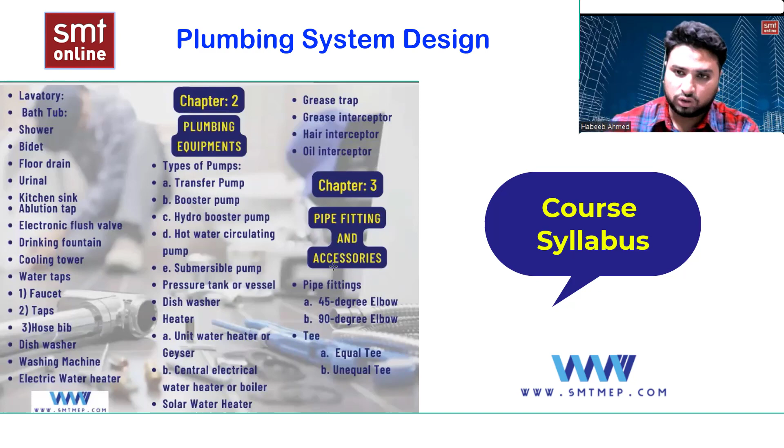We'll see why they are used, what the materials are, the purpose, and the impact of having these fittings connected to the piping. Accessories are something where you can easily increase or decrease the water flow, or completely shut it off. That refers to the valves.

So you'll be seeing a number of different valves, like ball valve, gate valve, angle valve, and globe valve. You can also see the NRV, flexible connector, and pressure gauge. These all come under the accessories. Okay.

Chapter number 4, you'll be dealing all about pipe material. Pipe is a conveyance of fluid from one place to another, just to deliver to the fixture what it is demanding, so that it has a convenient place for a human to live. So we'll be seeing what are the different categories of pipes used in the plumbing industry.

Basically and technically, there are only 2 families: metallic and non-metallic. Right now non-metallic has completely taken over metallic, but in some cases, as per the application or the fluid you're dealing with, metallic pipes are still used. Yes or no? So we'll be seeing that.

So we'll be seeing what are the different categories, or different types of material. There is some pipe material which is not compatible with hard water, and some which is not compatible with soft water. So we need to know that. Unless we know this, it's very difficult for us to take a decision.

For example, if I'm trying to transfer hot water from one place to another, and if that pipe is not capable enough, it loses its elasticity, or it expands due to temperature, then it is not recommended. So where we can make our mind or take a decision is if we have the information that this pipe is compatible with a hot water system, then I can opt for that pipe.

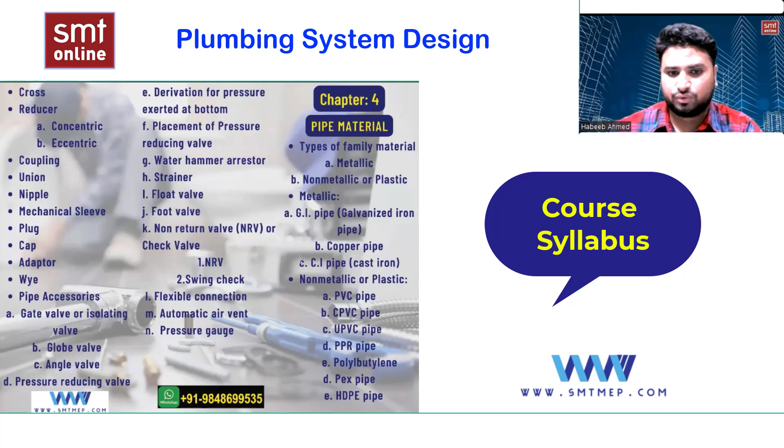Apart from this, chapter number 5 we'll be dealing with the basics of fluid mechanics. Very interesting. First we'll be learning the types of flows, like laminar and turbulent. Then we'll be seeing different kinds of water. Then the most important thing is the continuity equation, on which the complete plumbing depends.

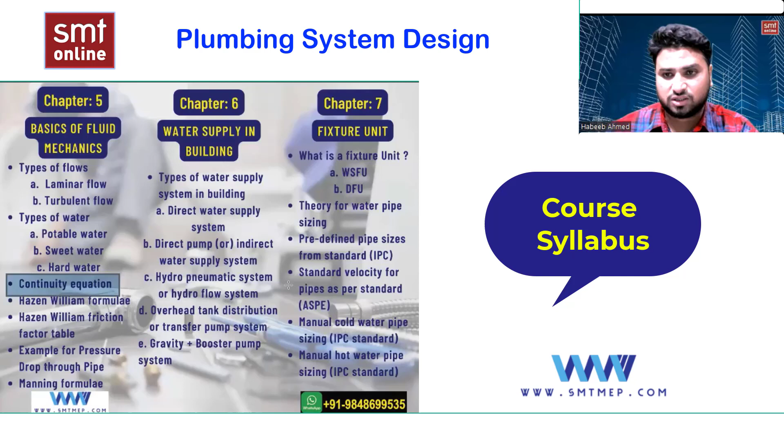That is Q equals AV. We all know this: Q is nothing but the flow, A is cross-sectional area, and V is the velocity. We'll be seeing these parameters and try to apply them in maximum cases, because plumbing is completely dependent on this. There are some examples done after that.

Hazen-Williams formula is there, which we'll be using for pressure drop calculations, because as the material changes, or the internal surface of the pipe is rougher or smoother, it has more or less pressure drop. So that is what we'll be seeing by means of the Hazen-Williams formula or friction table.

You can see here an example of pressure drop through a pipe. We'll see how pressure drop is affected with respect to the pipe roughness, internally. Then we'll be seeing Manning's formula, which is used for the drainage side. This continuity equation is for the water side, and this is for the drainage side.

Chapter number 6 is very important. We'll be learning the modes of water which enter into the building. We will be learning four to five systems here, so that if I know the systems, I can suggest which system is most feasible in a project, because you need to know certain circumstances or boundaries.

In simple terms, if you know how often water is coming from the municipal supply, and what pressure is available from the municipal, then you have parameters to make your mind and decide which water supply system fits best. So I can opt for that. Unless we know this, we can't decide what kind of building system to use to supply the water.

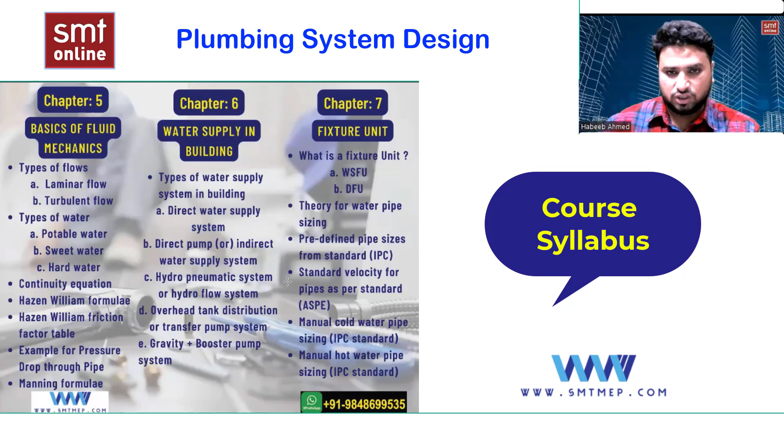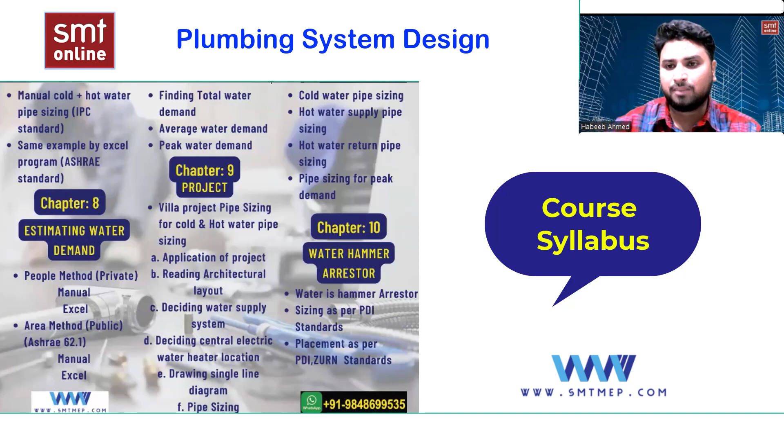Lastly, in chapter 7, I'll do the same example with respect to the manual method, so you have an idea of the comparison. We did it in manual form, now we did it in the Excel form - you can see this, what is the difference between this and this. Why are we teaching you in terms of Excel program? Because if Excel is not there, you can directly deal with manual, but manual is somewhat safer or on the higher side, you can say. But there are some drawbacks and disadvantages too. We'll be coming across those and doing the comparison with respect to that.

Chapter number 8 is very important because whenever you start any kind of project, you need to estimate the total water demand with respect to the project. This can be known by means of two methods - one is the people method and another is the public method, I mean occupancy or area method. So just remember this. This is the very first step we are moving towards in the designing. So chapter 8 is where we find out how much water is demanded for this complete project, which depends on the project.

If it's industrial or commercial versus residential, obviously industrial demands more water. So there are two methods to find the water demand - one is the people method, which I'll use for private applications by means of manual and Excel. The area method I'll use for public applications, also by manual and Excel. After finding the water demand, my main intention is to find the average and peak water demand. What is average and peak? We'll see later on. As of now, just remember minimum and maximum water demand is what we're finding in chapter 8.

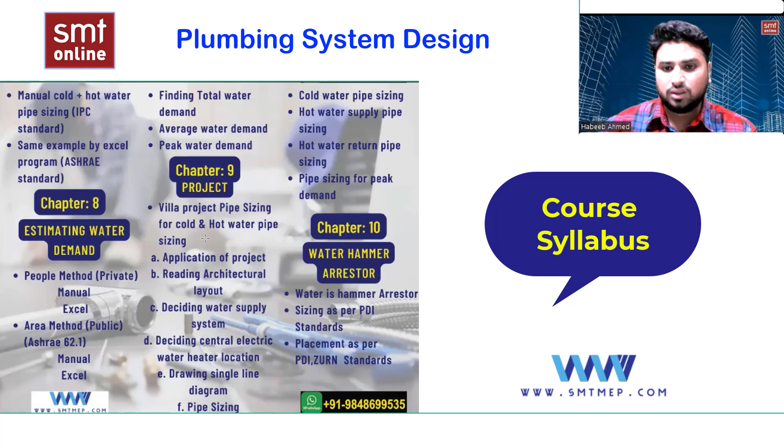Chapter number 11 is tank designing. Again I'll be doing the tank designing with respect to chapter number 9, the villa project. So in that villa project, if there was a tank sizing requirement, how much capacity should the tanks be? Underground, overground, or rooftop. So we'll be dealing with how to handle this.

And most importantly, I'll be dealing with this with respect to IPC standards, NBC standards, or public health engineering. So I can derive or find the sizing of the tank with respect to these 3 standards: NBC, IPC, and public health engineering. NBC is local, that is India. IPC is international. Public health engineering is also local, from Odisha. So I can deal with this.

So in this chapter you will learn all about tank sizing. We'll be dealing with underground tank sizing, roof tank, and loft tank. So these are the 3 tanks we will be sizing. And not only this, we'll be sizing a number of other things too, like the vent pipe, the drain pipe, and the overflow pipe. A huge amount of theory for tank sizing we'll be learning about in chapter number 11.

Chapter number 12, again on the water side, we'll be dealing with water heater sizing. We know there are different kinds of water heaters: one is geyser, one is central heater, and one is solar heater, which is right now going in the market. So we'll see all three heaters and how to design them.

So we'll find out what should be the capacity with respect to the villa project again. We'll take the example of the villa project and try to determine, if this villa had a central heater system, what would be the capacity of the central heater, electrical I'm talking about, what would be the central electrical water heater size?

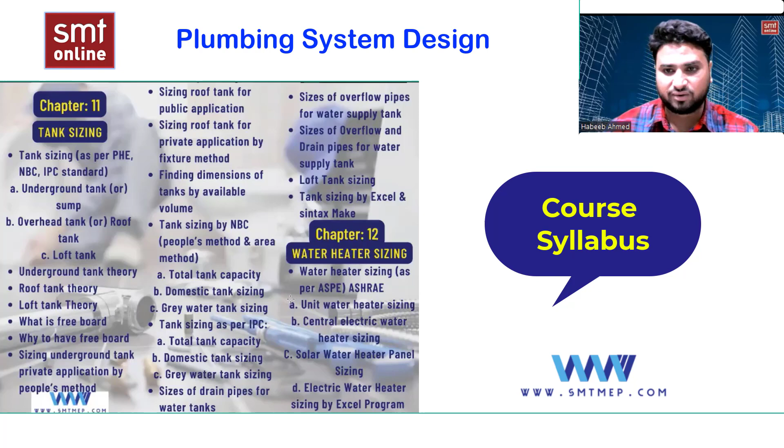Okay, this was about electrical heaters. Solar we don't, because solar is a different concept. Solar does not use electricity. Okay, so this is in chapter number 12.

Chapter number 13 will be dealing with pump sizing. First of all, we'll be learning some basics: what are the types of pumps, then what are the kinds of pumping systems, I mean the two loops, closed or open. Then afterwards, we'll be moving on with sizing.

Again, we'll be taking the villa project as a reference. For example, I'll size one transfer pump, and once the transfer pump is sized, I'll be taking villa C as an example, because in villa C there is a booster set installed. So we'll do that calculation, and after that we'll compare what actually has been done and what we have done, to see whether we are right or wrong.

So we'll be dealing with transfer pump sizing, booster pump sizing, pressure tank sizing, that is pressure vessel, and the hot water circulating pump. And we'll be dealing with one more pump, that is gravity plus booster, which is kept at the rooftop.

Okay, I'll not elaborate; when we deal with chapter number 13 in detail, we'll see the number of pumps and pressure tanks and how to size them. That means we are here to find out how much horsepower of pump is needed for this project. Chapter number 14, the last one, deals with the garden water sprinkler system. So this ends the water supply.

Now phase 2 of the plumbing, that is drainage. Drainage is not so lengthy and not so difficult. First of all, we'll have some theory. Then we'll see the different categories, like soil pipe, vent pipe or waste pipe. We'll see these classifications and learn what exactly they refer to, that means what pipe carries what, and what that pipe is called.

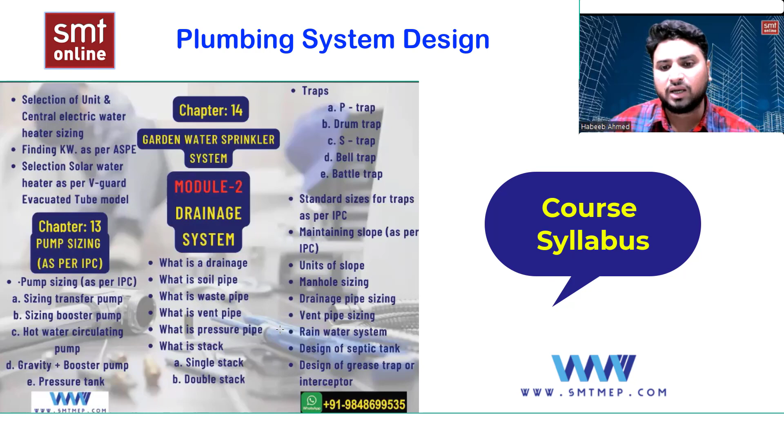We'll be dealing with vent pipe and rainwater system sizing, design of septic tank, and design of grease interceptor or grease trap. So these are the things we're going to learn in the complete plumbing design. I hope now you have a complete overview. Inshallah, when you are done with this, you will be capable and familiar enough with how to deal with this service. Okay.